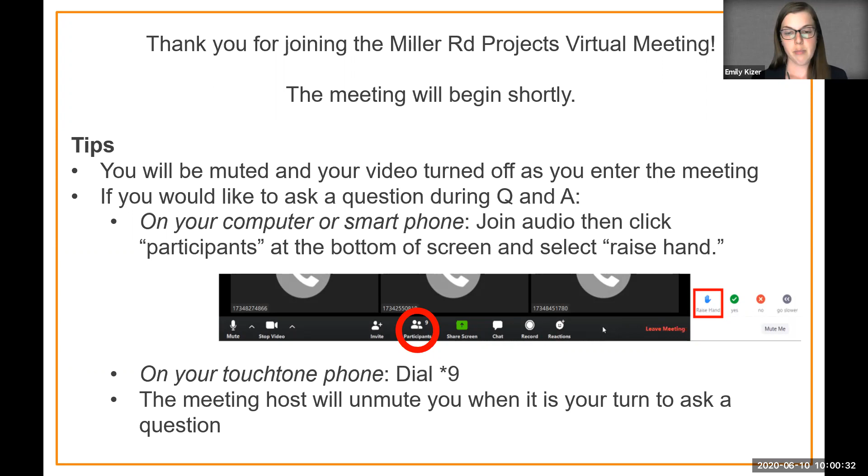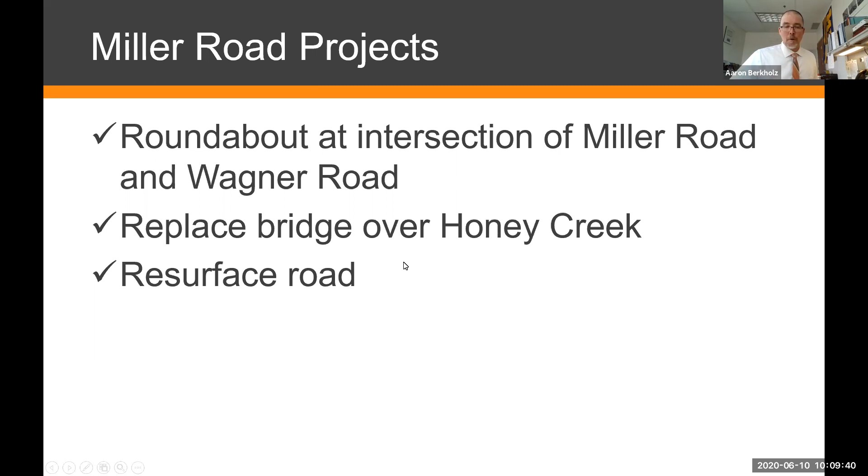The roundabout project will involve the construction of a single lane roundabout. It involves a fair amount of curb and gutter work, and there will be stamped concrete used for the splitter islands, which is what we call the center islands as you approach a roundabout. The interior circle will also have stamped concrete. There's a smaller interior circle that's a 30-foot diameter, and a larger diameter circle that's about 80 feet, which provides a truck apron on the interior of the roundabout for trucks that are turning. That truck apron area will also be stamped concrete.

We're going to be installing street lights at the intersection.

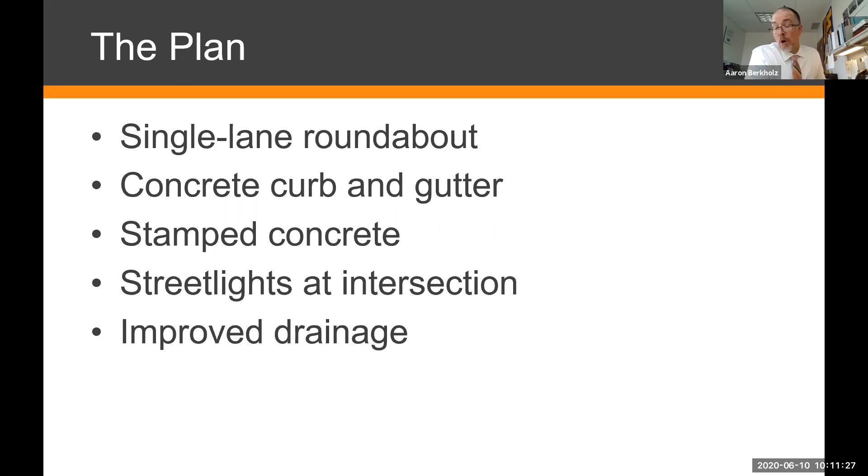We've been in discussions with the DTE street lighting group, and that's needed for the safe operation of a roundabout. We need to illuminate the roundabout with street lights for it to be safe. We'll also be making drainage enhancements. With the curb and gutter, we're creating concentrated road runoff, which will be handled through the installation of new storm sewer, curb and gutter storm inlets, and new storm sewer construction as part of our work.

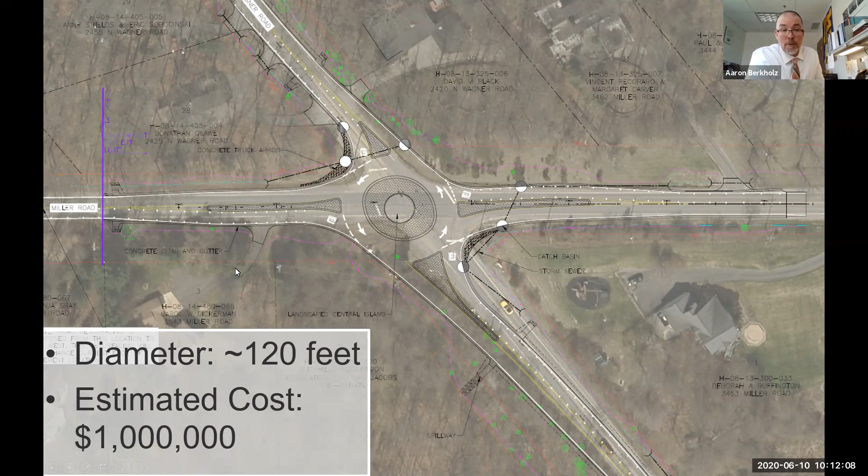I mentioned the nighttime illumination needed to promote the safety of the roundabout. We've worked on several roundabout projects in the past, and working with DTE, we've enhanced the illumination to focus lighting where we need it, on the roundabout. There have been some lessons learned on our part, as well as DTE's, that have enhanced our focus of that lighting where it needs to be.

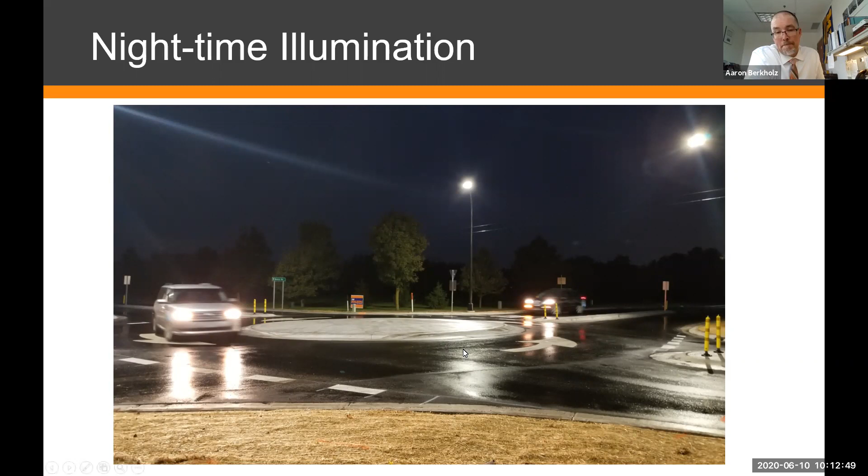Some advantages of a roundabout: for this project, based on the peak hour traffic identified through this very busy intersection in the county, we looked at a couple different types of enhancements. We looked at potentially a standard intersection widening with traffic signal lights, and then a roundabout. The advantage of a roundabout is it moves traffic more efficiently, allowing motorists to continue at a safe speed through the roundabout based on existing traffic movements. It slows the traffic.

On the approaches to the roundabout, we construct splitter islands. That requires a reasonable motorist, as they approach, to slow their speed and yield to traffic within the roundabout, to look to the left to see if traffic is approaching, and to be able to stop at a reasonable speed. We're very thoughtful in the way we design and construct the approaches to a roundabout in order to promote those slower speeds.

The alternate, or opposite, is a traditional signalized intersection, where traffic approaching with a green light maintains its current speed. So by comparison, a traditional signalized intersection allows a higher rate of speed.

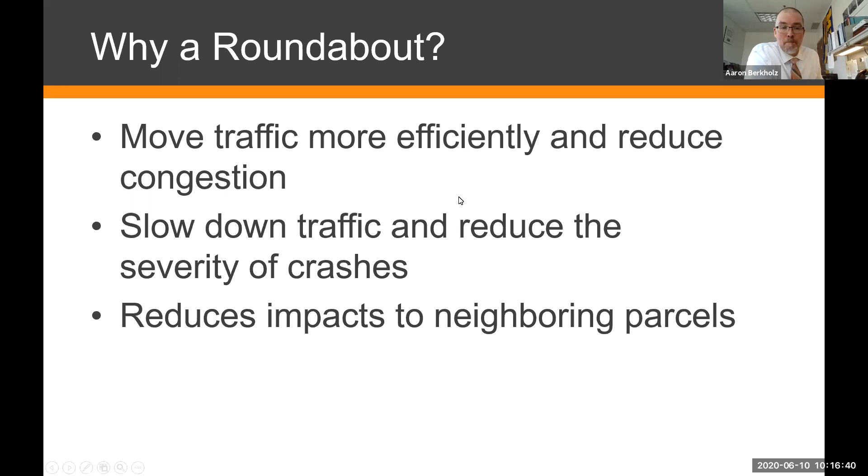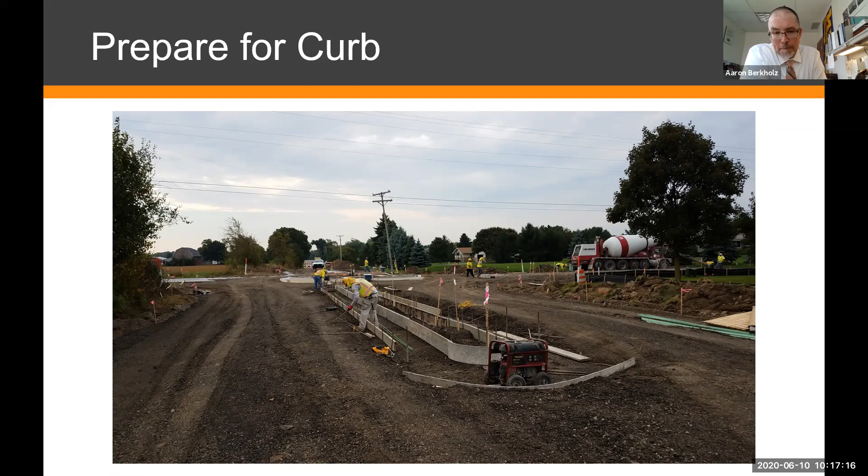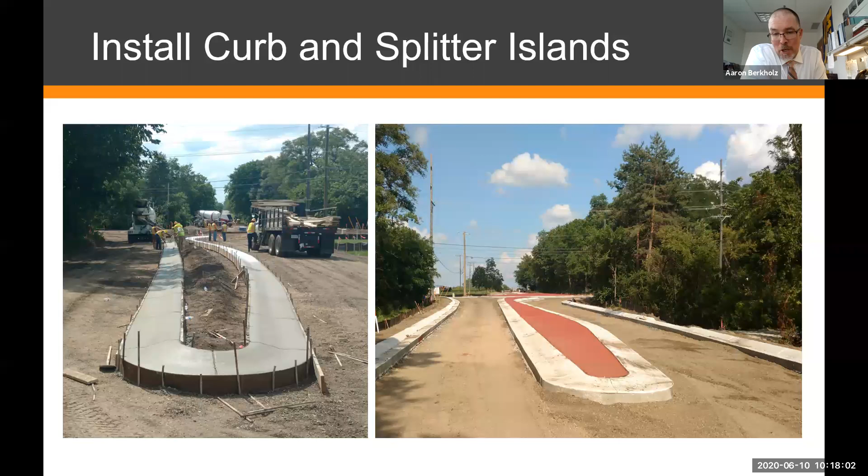And there's a completed splitter island. You've got curb on each side, and the middle splitter island. This one has colored concrete in the middle - I don't believe that's been stamped, looking at this photo. A further enhancement to our roundabout will be that the colored concrete will be stamped concrete to create a more attractive appearance.

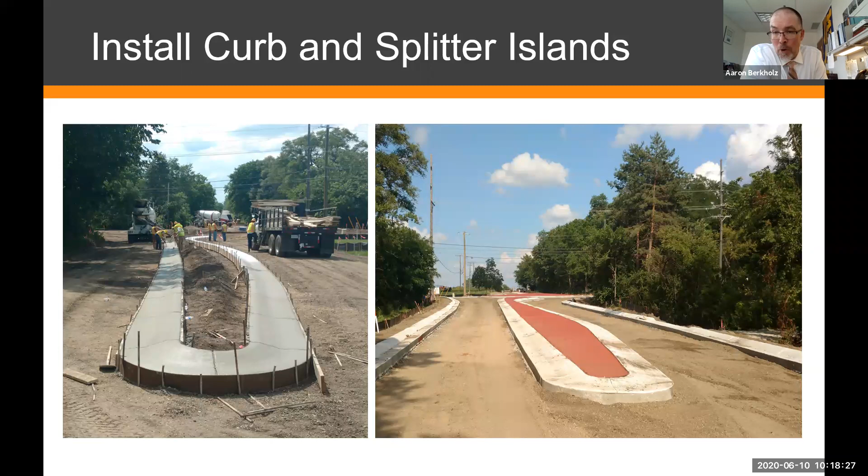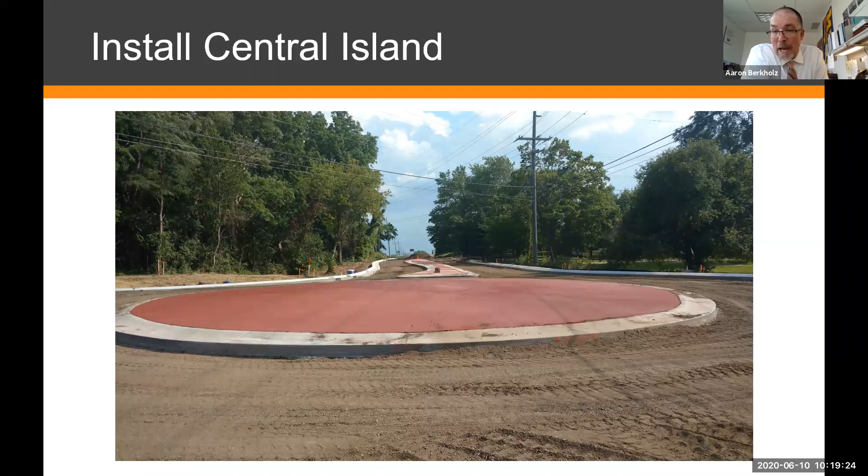Here's an interior island, a central island on a roundabout. Our island varies from this one in that we will have a smaller diameter circle inside, approximately 30 feet in diameter, that will accommodate plantings. We've been in discussions with Scio Township - they have interest in pursuing attractive plantings and maintaining those plantings within that 30-foot diameter center of the roundabout we'll be building at Miller and Wagner. So with the colored stamped concrete and the central island with potential plantings, it'll further enhance the attractiveness of the completed project.

In general, and as we're going to do on this project, it'll involve the placement of 2 courses of asphalt: a leveling course and a top course. The top course is what you see when you drive any road, and when you drive the new roundabout, what you're driving on will be that top course asphalt pavement. A roundabout is challenging to asphalt pave because of the circular nature and some unique angles, but working with our asphalt paving contractors, we've gained significant experience over the years as to the best way to complete this type of paving.

I've mentioned before that the construction site can be a very hazardous place. There's a variety of hazards there. In some instances, we have live traffic adjacent to the work we're doing - in this case, we will not, since we're closing the intersection at Miller and Wagner to do the work. But oftentimes traffic presents a hazard to on-site personnel. Personnel also have to be concerned with equipment on the job site, and wary of the actual materials used.

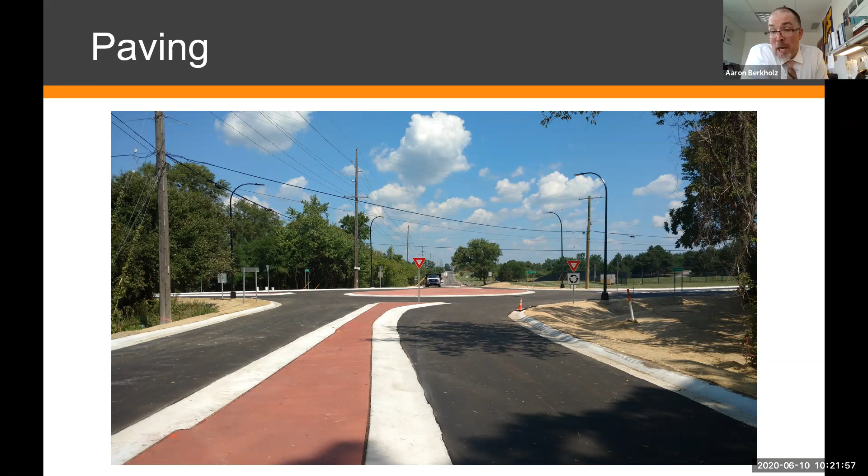Asphalt is placed at approximately 275 to 300 degrees Fahrenheit, and it can cause severe burns. So as we enter the asphalt paving phase of the project, we ask that adjacent residents, or those interested in seeing the construction, be very aware of that asphalt going down because it can be quite dangerous.

A big part of the function of a newly constructed roundabout are pavement markings and permanent signs. You can see in this picture this provides clear direction to entering traffic as to the need for approach traffic to yield, and that traffic within the roundabout actually controls the flow of traffic.

Over time, as a new roundabout is constructed and opened to traffic, motorists go through a learning curve. We as Americans, by and large, are used to a stop-controlled intersection, a four-way stop, or a traffic signalized intersection, so there's a learning curve for some motorists to learn how to use a roundabout. During that time, some typical confusion you'll see is people, as they approach the yield, will stop even if there's no traffic in the roundabout.

They're just so used to stopping at an intersection, they'll stop at the yield sign. Sometimes people that are in the roundabout will stop in the roundabout in an effort to let other traffic enter. But over time, through pavement markings and permanent signage, motorists learn how to use it correctly, and that's ultimately what enhances traffic movement, particularly during peak hours.

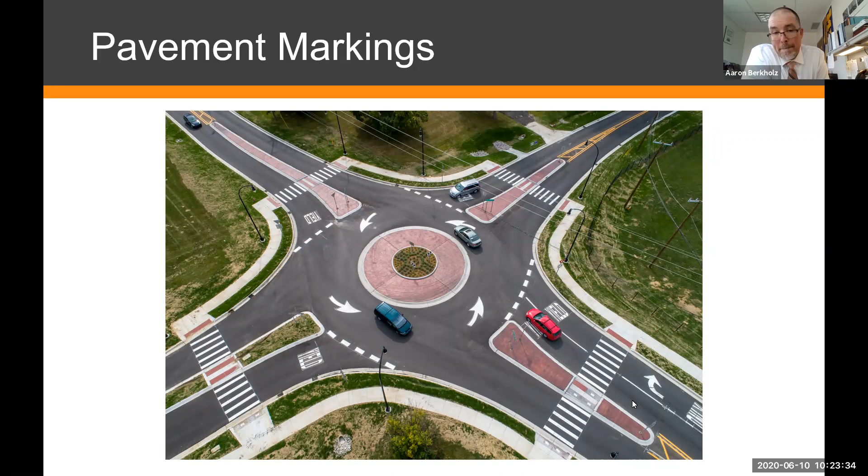This is just a review of a couple of things I've mentioned. The traffic entering the roundabout is the traffic that yields. There's a counterclockwise movement within the roundabout, and the island controls the speed. The speed control for a roundabout is a combination of the approach angles and the construction of those splitter islands and the central island.

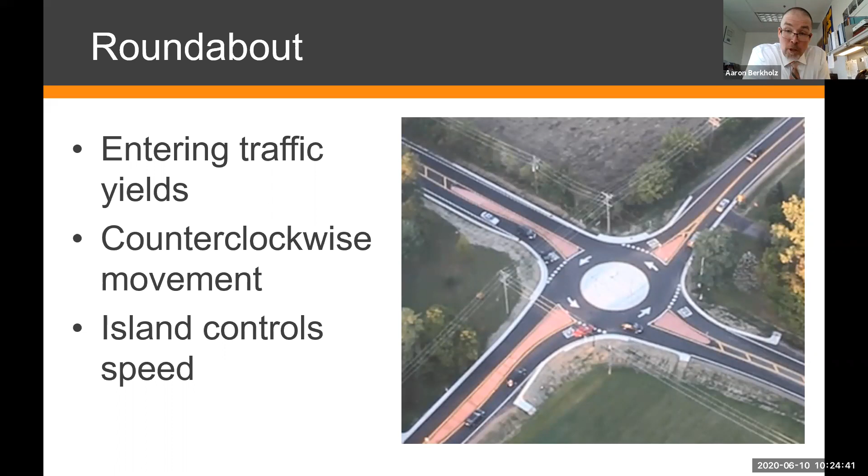Because that's a raised island, the first inner island is raised, but it still allows truck turning movements, since we look at the turning movement of trucks as they go through the roundabout. So that initial piece of the interior island allows trucks to ride up on it. The center part of the island is raised even further to prevent traffic from driving straight through the intersection.

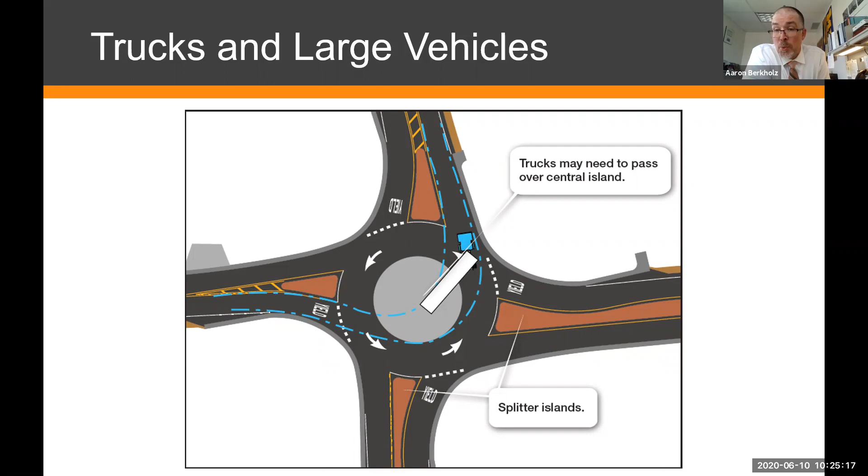Trucks and large vehicles, in order to negotiate a new roundabout, need to pass over the central island. So that outer part of the inner island, the central island, is raised but only to the point where it still allows trucks to pass over it. What trucks will be riding on is the stamped colored concrete that's the interior part of the roundabout. With that, I'll turn it over to Nate, and he can speak more about the bridge portion of the project.

Thank you, Aaron. My portion of the project is the bridge down at the bottom of the hill there. As Miller goes around the curve, there's a bridge crossing Honey Creek. The existing bridge was built in 1947, and as Aaron mentioned, it is load rated to reduce the allowable truckload that can go across it. The existing bridge is a 30-foot span length and about 34 feet wide. The existing foundations are critical for scour, and for all these reasons we applied for funding for this location and received it from the MDOT program.

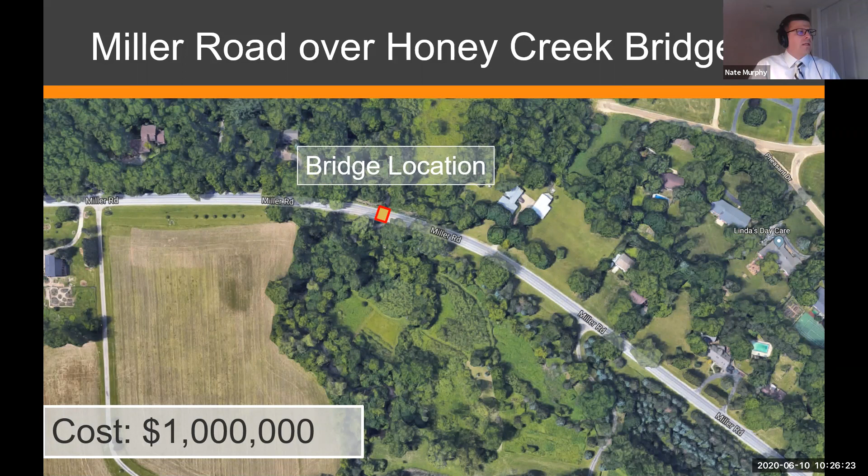So this is the location shown here. You can go to the next slide for me, please. The proposed replacement for this structure, instead of going back to traditional steel beams and a concrete deck, is to go with a more simple, quicker to construct bridge type.

It's a box culvert, and the proposed bridge span will be a 26-foot wide opening, and the vertical will be about 9.5 feet. It will be placed as precast segments of concrete, precast off-site, brought onto the site and placed, which makes it a quicker construction schedule and yields a very durable bridge that has a lot of longevity.

Another part of the layout considered during design was correcting the horizontal curve. Currently you have to make two turning movements to adjust and go through the curve, and we've now modified that so there's a single horizontal curve, and you would only make one movement. So that makes a safer and more up-to-standard roadway design.

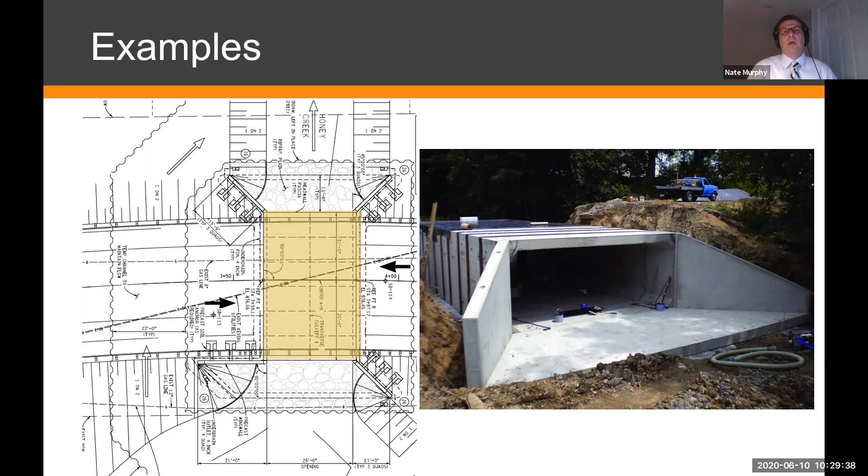So on the left is a snippet of the plan of this proposed bridge. It will have return walls. These wing walls that go out at an angle will also be precast and placed. This makes a quicker construction schedule, and after the placement of concrete is completed, they will backfill and construct the road over, just like any other road, with the aggregate base and then the hot mix asphalt on top.

So Aaron, do you want to cover this? You want me to go in on this one? Sure, I'll jump in, Nate.

Thank you. So I mentioned the third component in the overall infrastructure investment here is an improvement between the bridge and the roundabout on Miller Road. That's going to involve crushing and pulverizing the existing asphalt pavement. That asphalt will be reshaped to provide a crown, compacted, and then an asphalt overlay will be placed.

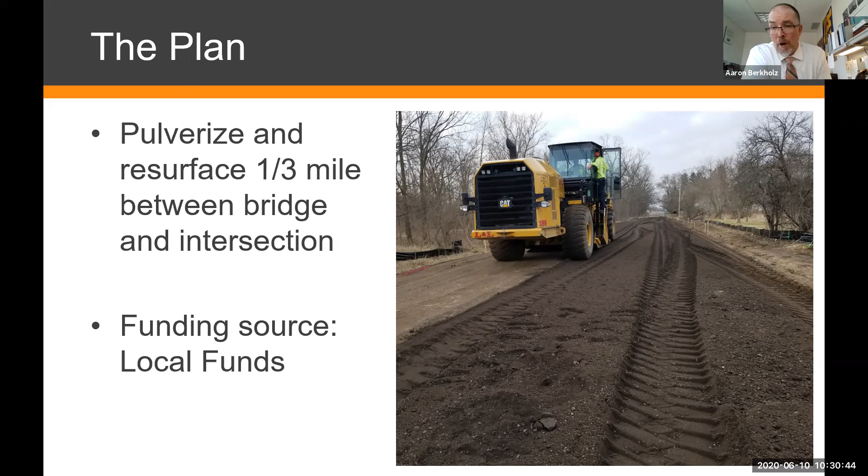Next slide. So here's an example of a pulverizing machine. We will be pulverizing and resurfacing approximately the 1/3 mile between the bridge and the intersection. This part of the project is being funded directly with Michigan transportation funds out of the Road Commission budget.

Next slide. So again, the crushing, shaping, and asphalt overlay, based on the currently forecasted schedule, we foresee occurring at the end of the project. The roundabout would be the first piece of our project, beginning in late June or early July. That's something we'll be talking further with Fonson, the contractor, about to determine their schedule.

We expect the bridge to start sometime after July. Based on the permit for the bridge issued by the Department of Environment, Great Lakes and Energy (EGLE), we're not allowed to work in Honey Creek until after July 1st due to fish spawning periods. So the bridge by its nature would have to start after July.

Both projects, the bridge and the roundabout, have to be completed by the middle of October. At this point, the intention is to start with the roundabout, continue with the bridge construction, and wrap up the project this fall with pulverizing and resurfacing that 1/3 mile between the two projects. But that's something we'll discuss further with Fonson.

As I mentioned before, there are aspects of field construction that are beyond our control, and so there frequently will be adjustments in the schedule on a project like this.

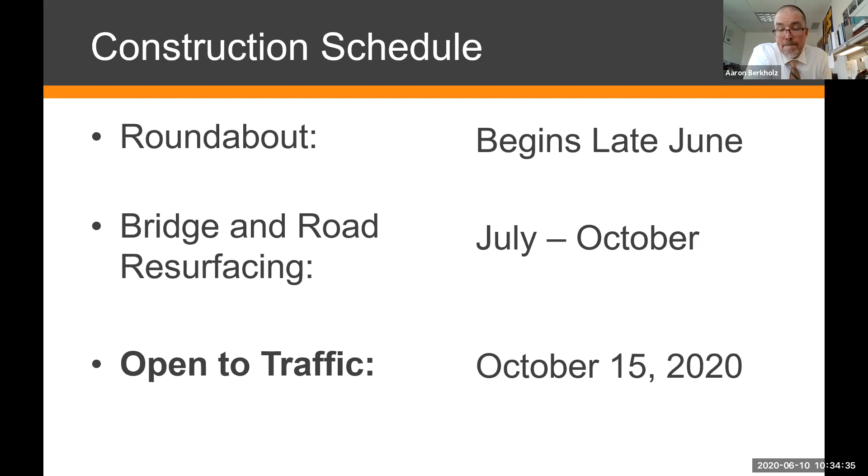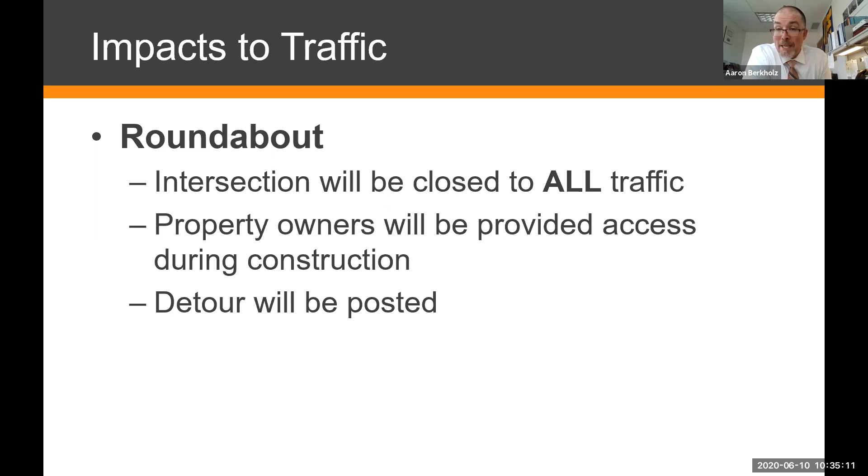Next slide. Again, I'm jumping ahead a bit, I apologize. The roundabout intersection will be closed to all traffic. We'll provide access to property owners during construction. Nate has already reached out to Advanced Disposal, who handles rubbish and recycling pickup, and we've advised them. We will also reach out to the Ann Arbor Post Office to notify them of the upcoming project. There will be detours posted with this construction.

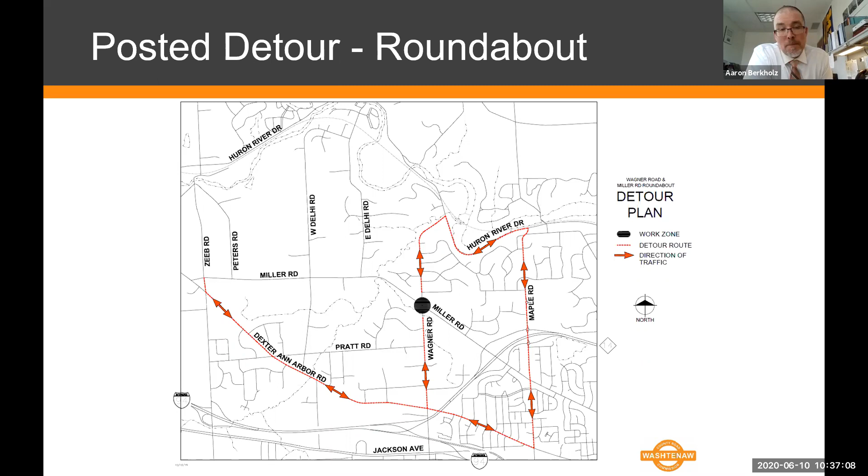Go ahead, Nate, why don't you jump in and talk about the impacts to traffic for the bridge and the resurfacing. The bridge will begin after July, as required by the fish spawning restriction, so we have to stay out of the river until after July 6th.

But when we go to the bridge construction, all of the local traffic will be maintained access, meaning you will be able to drive into your driveway and the contractor will provide a means for you to do that during the duration of the project. Again, the detour will be posted for this second half of the project.

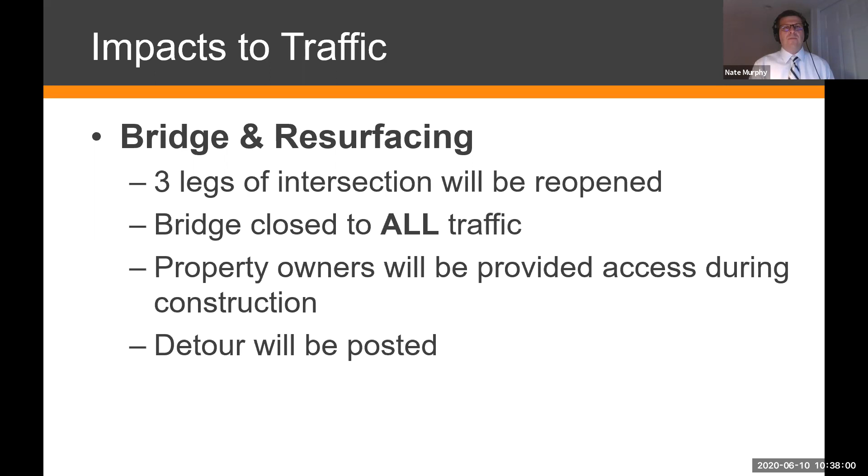This will be the detour as posted once the roundabout is substantially complete and traffic can maneuver through it. The west leg of the roundabout will remain closed to through traffic, and as you get down to the bridge, there will be a gap there. No traffic will be able to go through the location of the bridge, but if you live either side and you're inside the construction area, you would always be provided access, and we will ensure that is maintained as well as the contractor. So this detour, as posted here, will be utilizing Dexter-Ann Arbor and Wagner to maneuver around the work zone.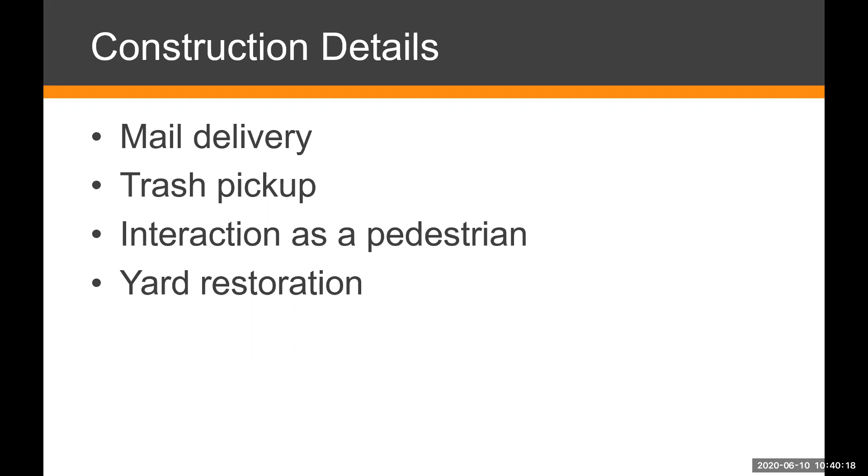Before we go to the next slide, it's important to mention that this intersection is also closed to pedestrians during construction. We've had previous projects this year where pedestrians have damaged or nearly damaged fresh concrete that's gone down. It's sometimes confusing whether closures apply to pedestrians and bicyclists, but these closures do. It isn't a safe place to be a pedestrian or bicyclist while we're constructing these roundabouts and the bridge. So the closures apply to all vehicles and pedestrians as well, so please keep that in mind. Thank you, Emily, that's good to mention.

Here is some additional information and locations for you to get updates. We have a subscription - if you would like, we can get your email and you will get project updates during the course of the project. This is my number and email for you to contact me directly if you have detailed questions or would like to speak to me. I'm happy to help you at any time throughout the project, and look forward to getting a really nice finished product for you to use here.

I'd like to mention that as Nate and I have presented today, we decided to split up the presentation because we'll both be working together on the project. I'm more focused on the roundabout and Nate more focused on the bridge, but I would recommend you contact Nate first. He'll ultimately be overseeing the entirety of the project, but I'm certainly happy to help as well. We provide Nate's information here as that first point of contact for the roundabout or the bridge, and I'll certainly be happy to be Nate's backup and assist him and any of you in any way I can.

One of the first questions, coming from Greta, Nate and Burke: how are we getting the space for this roundabout? Are you filling the valley to the southwest?

Nate, do you want to touch on the dimensions of the roundabout and how we fit it into the existing intersection?

Yes, so the roundabout does take up a little bit more space than what the original right-of-way allows. We had to acquire some corners at the circle, and we have some easement, roadway easement along the south side, along the south leg on the west side of Wagner. That was mainly just to pick up the change in the geometry.

The width of the road, once you get out of these wider splitter islands and you're in just the normal, shallower splitter, is about 42 feet wide. That's less than if you had a 5-lane setup, so if you had 2 lanes each direction and a center turn lane, it takes up less footprint than using that style of intersection.

But there will be some fill there, as you're asking, on the Wagner side, the west side, just in order to support the roadway. We had to extend our limits out there, and you might have noticed some minor tree removal there.

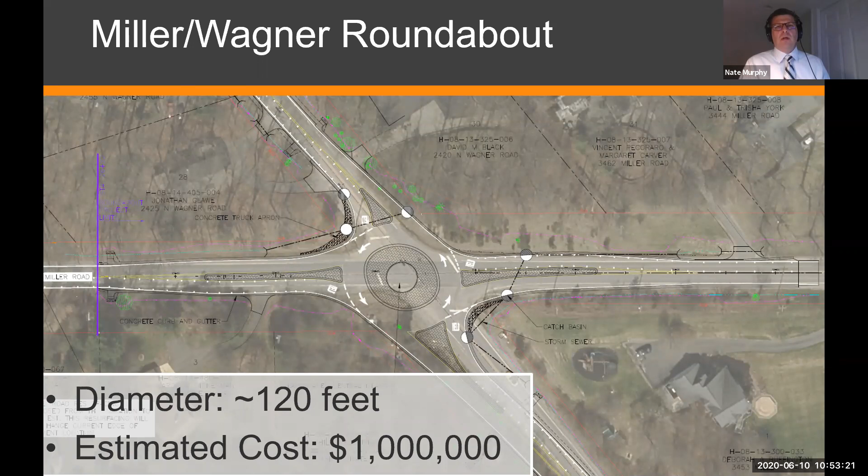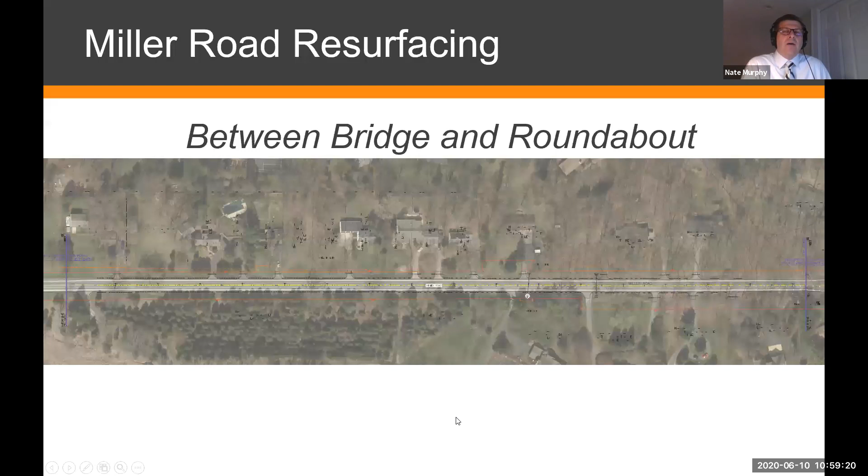Thank you for that question, I intended to cover that. On the bridge cross section, on the outside of the curve, which would be to the north, we have a 7-foot shoulder. On the inside of the curve, we have an 11-foot shoulder. These widths are dictated by MDOT standards, designed for any new bridge that is placed. You base it on the amount of traffic, the curve, and all the geometry. So the proposed will be 7 foot on the north and 11 on the south, which is far greater than what is out there currently.

Okay, thanks Nate. So the next question is from Barbara. She says they live on Miller between the bridge and this intersection. What is the plan for us to access our driveways? She has a son who has special needs, and the school bus usually stops right at their home. How is that going to work during construction?

Thank you for the question, and yes, we will be in contact with the schools. As so many of us have experienced, the pandemic has introduced some uncertainty into not only this school year that's ending now, but the upcoming school year. But certainly our intent is to communicate with the school districts involved and make sure they understand there will be limitations as to their routes, but that we will provide access for those students to be picked up. So that'll be something we can follow up on and ensure the schools understand where we're at in the project, be it the construction of the roundabout or the subsequent construction of the bridge, so that they know as that new school year starts which route they should follow in order to pick students up.

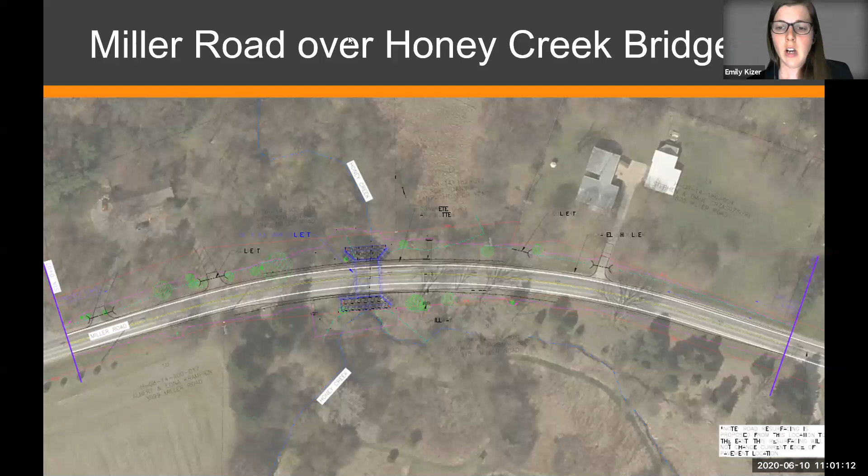Okay, thanks Nate. The next question comes from Carol, and again this is about access, so we may have already covered it, but Carol's asking, what exactly do you mean by access during construction? I think we've already covered that one, Carol. It may be a little messy at times, but we're going to work with property owners to make sure that you can get in and out of your driveways as needed. And as Nate mentioned, this is asphalt and not concrete, so it's a little bit different animal.

Nate, is there anything else you want to add there? No, and again, I understand the question, it's a great question to ask. Providing access doesn't mean necessarily that it's going to be a hard surface, because as we do the work, pavement will have to be removed in order for us to construct the new roadway cross section, to place the new aggregate base and the new pavement, and for us to be able to construct concrete curb and gutter.

Access means that it's traversable, that you'll be able to drive in and out. But to be very blunt, I like to tell people up front that it will get ugly before it gets better, because part of road construction is we need to come in with big equipment, remove the existing road, and then start construction of the new road. So when you first see that road work going on, it can look pretty ugly, but it just takes time for us to put it back together and construct a longer lasting pavement.

Thanks, Nate. We've had some questions about how to get information and where our links are at, so I wanted to pause here for a second and show you this project page we've been talking about. If you go to WCRoads.org, which is the Road Commission's official website, we have a plethora of information on there. If you go to roadwork and construction, you can find this current projects page that I'm on right now, with an interactive map of all our current projects planned for 2020.

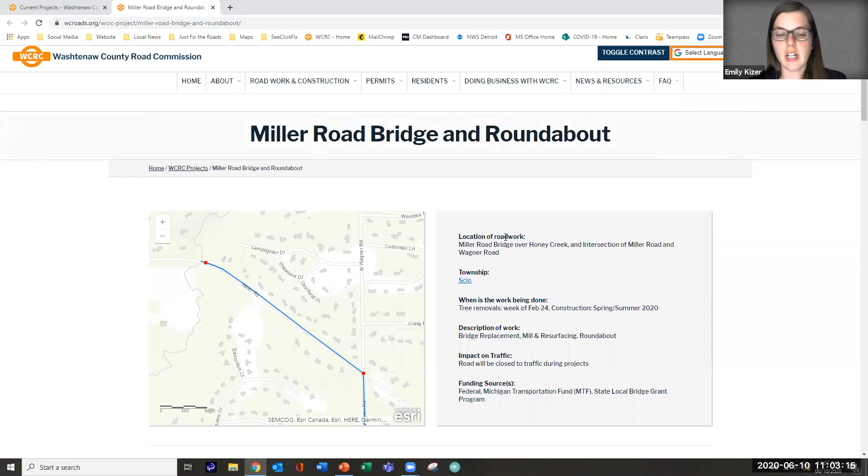You can find the Miller Road projects here, and if you click, you can see the page I keep talking about. This has all the information we've talked about today. It has Nate's contact information right here, links to the slides we presented in October at the design meeting, links with some FAQs that we'll update as we get closer, and a link to the Detour. You can also subscribe on this page to receive project updates by clicking the subscribe button on the bottom right hand.

You can subscribe to all sorts of road updates. We have project-specific updates for this project if you only want to know about this, or you can subscribe to receive updates based on a township. We really try to put that information out there, and that's going to be a great way for you to get the latest information about all these coordinating closures and things we've been talking about. That's all available right on WCRoads.org, and we have that for all of our major projects this year. There's a lot of construction in 2020.

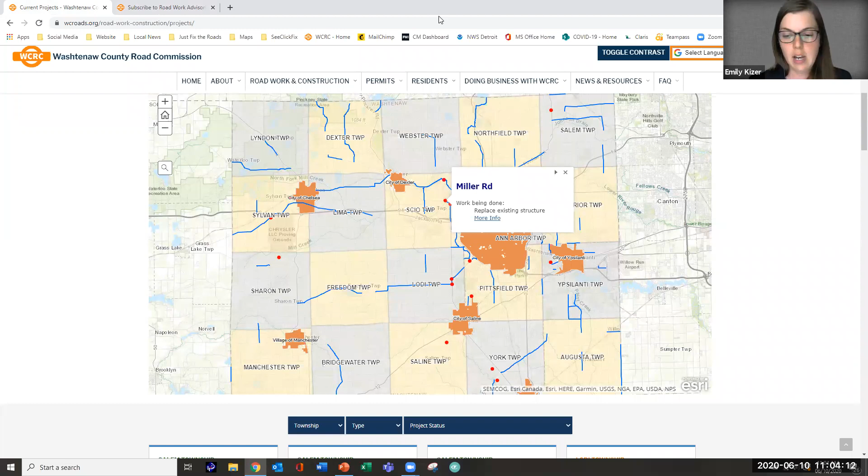This one comes from Sonia, and her question is: just to clarify, this is a two-phase project. The first phase, roundabout, will be completed before the bridge. I know we've talked about this, Aaron, could you clarify one more time? I know we're still deciding dates with the contractor. The intention is, through our bid documents, that they construct the project in two phases - work on the roundabout project first, then undertake the bridge construction second. That would allow for the reopening of the Miller and Wagner intersection in the roundabout format, and allow traffic to flow through that intersection before the bridge would be closed.

However, we are going to talk to our contractor, Fonson. We've provided them with flexibility. Basically what we won't negotiate on is the start date and them providing access for the residents. Those are the things we dictate to them. We also have a completion date, that being mid-October, but we do grant extensions of time if there is a good reason to do so - things like an extended period of bad weather where they couldn't get work done. There are various qualifying events defined by MDOT that allow the contractor to file, and for us to consider, an extension of time on the contract.

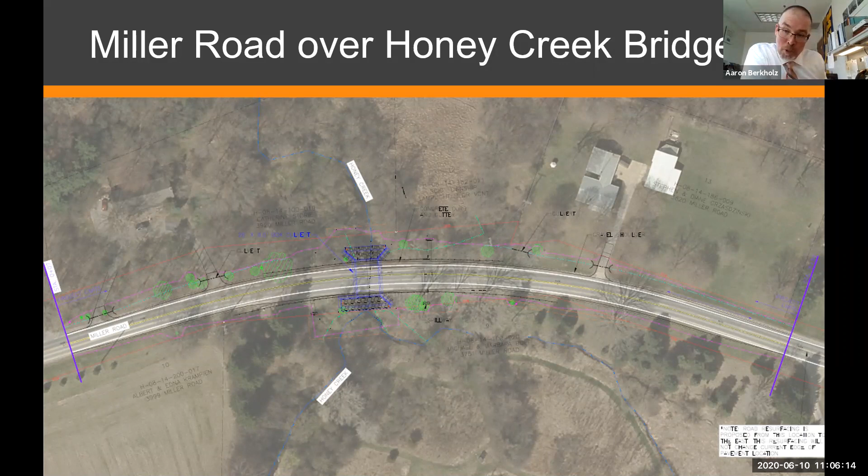So to get back to the question, what we've envisioned is roundabout construction first, substantial completion of the roundabout, and then the contractor undertaking the bridge construction and the closure associated with the bridge. But we do want to talk to Fonson about that and see how they forecast the job being most effectively and efficiently completed.

Okay, thanks, Aaron. So then here we have a question from Kareem: will the higher load limit on the bridge allow heavier trucks and tractor trailers on Miller Road?

This bridge, as required by federal funding, will be designed to take the MDOT loads, which is a higher load than what is on it right now. Right now it's limited to 30, 49, 65 tons. So that might not mean much to you, but that tells truck operators if their axle weights are at these limits, they cannot go over this bridge. Because this is using federal funding, it is designed to the load requirements of federal bridges, so yes.

The road itself, though, Miller Road will still have the same weight restrictions as it would a normal county route before and after construction, right? Yeah, Emily, there's been no discussion that I'm aware of to change any classification on Miller Road.

Again, as Nate mentioned, the new bridge will be constructed to carry full loading. Part of the reason we do that is we're making the investment in a new bridge. We can't predict what's going to happen in the future, and a bridge, even beyond a road that's constructed, is a very long-term investment.